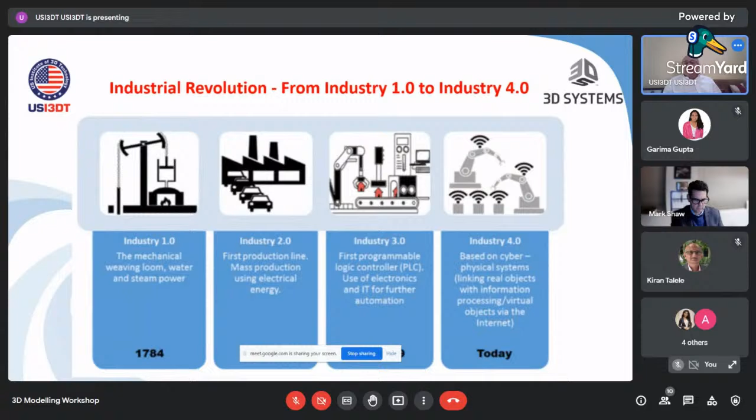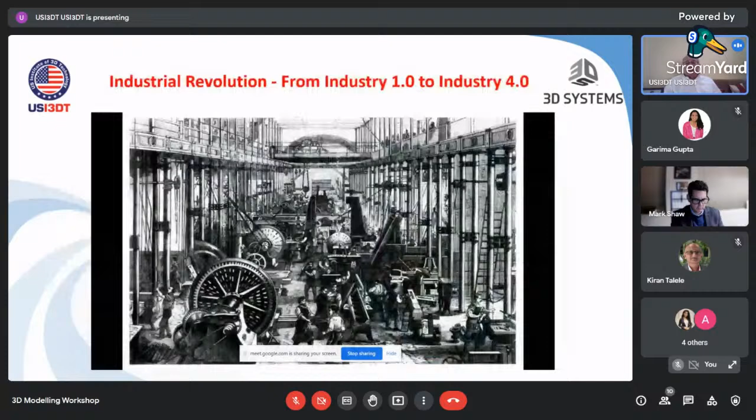Now, as I mentioned, we went through, from the late 1700s till today, different revolutions in different industries, starting with 1.0, then 2.0, 3.0, and now we are in Industrial Revolution 4.0, which includes 3D printing technology and many other technologies like AI, cloud computing, mobile technology, and robotic technology, with 3D printing playing the major role in this 4.0 technology of our century.

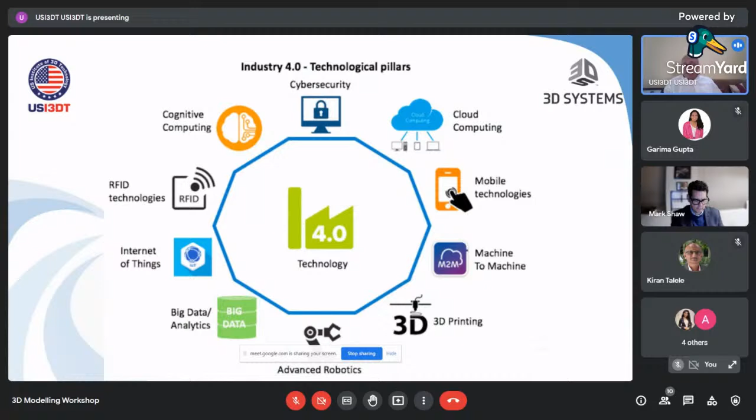I'm sure you know what 3D printing technology is. It's also known as additive manufacturing technology, rapid prototype technology, or layer-by-layer technology. There are many different ways that professionals in many different countries identify 3D printing technology, but bottom line, it's a unique technology.

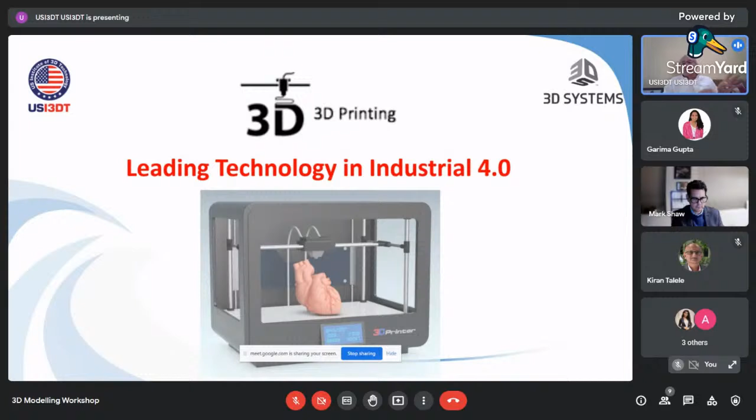Anything you design on your computer screen, you can have that object in your hand. No other conventional technology gives you this opportunity. You can print a house, an organ, furniture, an automobile, a motorbike, so on and so forth. Here you can see layer upon layer creating an object.

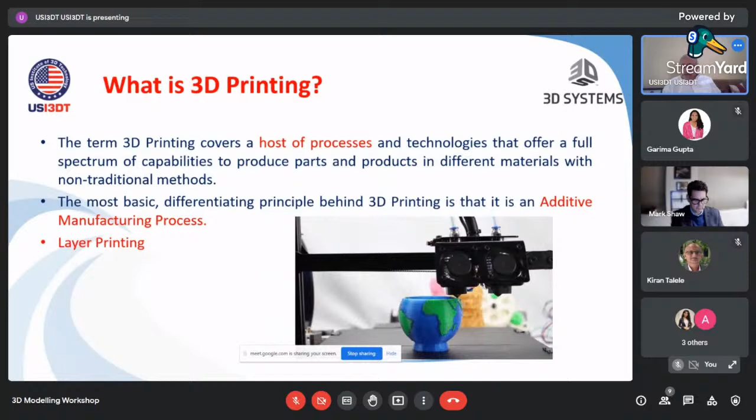If I show you the next slide, a video of how the 3D printer works - as I mentioned, design anything on your computer screen, upload the design, and select the appropriate raw material.

It can be chocolate, glass, metal, nylon, paper, plastic, rubber, biomaterial, or pharmaceutical mixture - whatever you select as the raw material, give a command and it will print. You will have an object in your hand without any other process or removing anything from that object. You will have the final product from the 3D printer, in 3D, right in your hand.

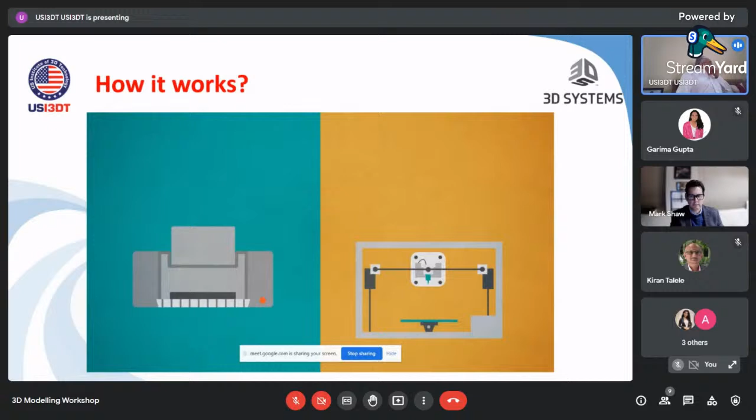Taking over the world. But how does it actually work? You can see in the video. Well, it's quite similar to a normal printer, but a little different. First, you don't put in an ink cartridge, but instead connect a spool of special printing material like plastic, rubber, or even metal.

And you don't print boring text documents, but real-life models of what you've just made on your computer screen. Simply awesome. Right now, you can buy a 3D printer yourself and make complex 3D models with modeling software. But if you're not really a wizard with technical stuff, you can buy personalized 3D models online, like fancy toys, bracelets, or phone cases. Then send it to a 3D print shop nearby, choose a material, and pick up your own unique item.

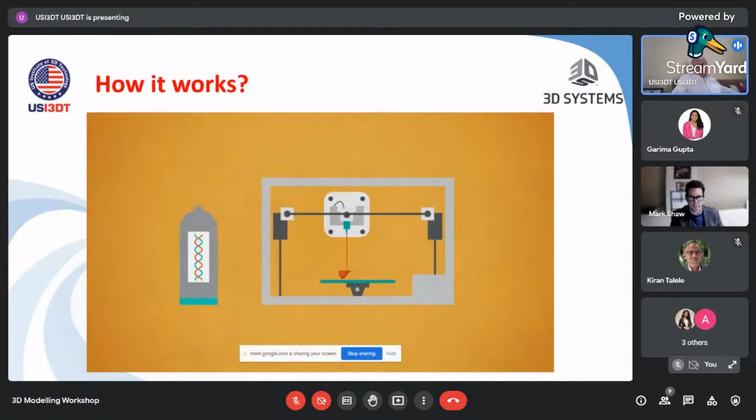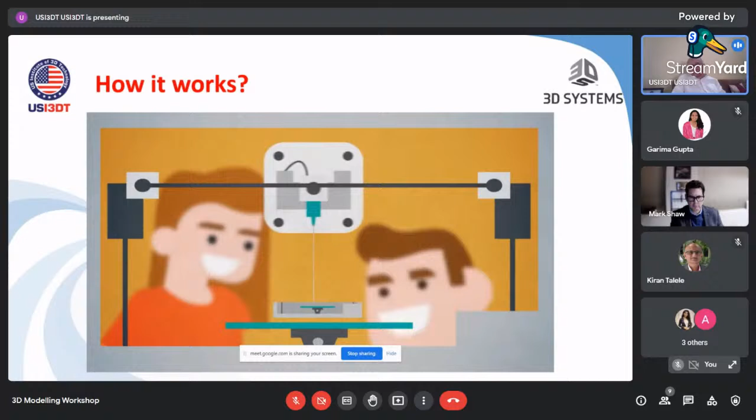And hold on to your seats. They're developing a 3D printer that can print in space and are planning to print a moon base. A moon base! But still, the coolest thing you can print with a 3D printer is another 3D printer. Booyah!

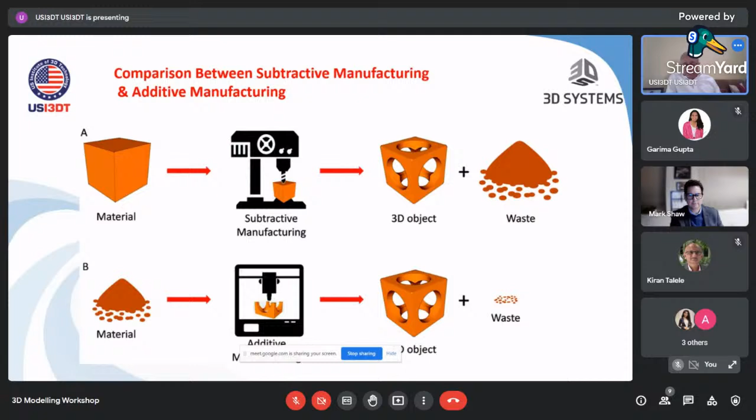Now, as we mentioned, and as Mr. Shaw mentioned, subtractive technology is when you have a big chunk of material and you remove something to give it a shape - that's called subtractive technology. 3D printing technology, on the other hand, is additive manufacturing technology. By doing it this way, it's very environment friendly, saves a lot of raw material, it's cost effective, and allows print on demand, and so on with the help of 3D printing technology.

Raw material - all the raw material available on this planet - you can use to print any object you want: PLA or ABS, carbon fiber, wood, ceramic, precious metal, food stuff, paper, fabric, concrete, or biomaterial. It depends on what you want to print. According to that, you use the raw material and select the technology and equipment, depending on how small or large the object is that you want to print.

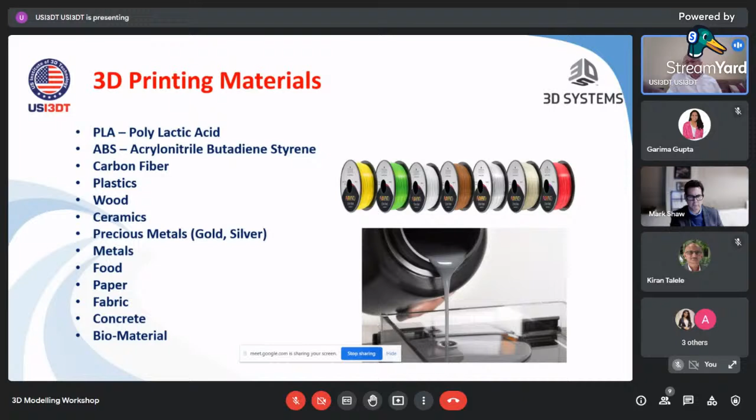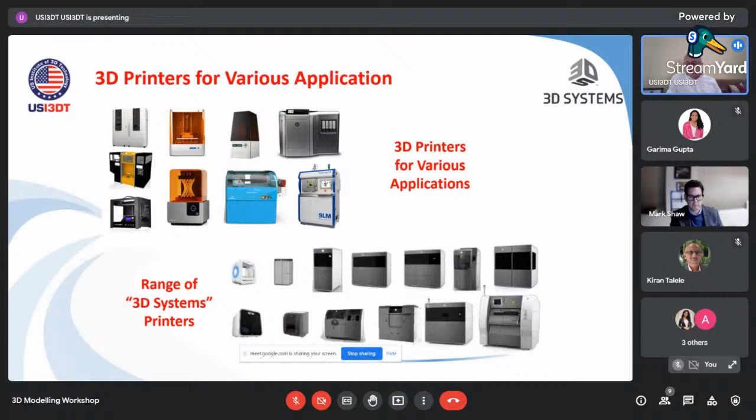There are various kinds of printers with different sizes. It all depends on what you want to print and what raw material you want to use. Here are the commercial grade printers. Industries are using 3D printing technology.

In the next session, we will talk in detail about the industries using 3D printing technology - specifically engineering, prototyping, concept modeling, plastic goods manufacturing, automobile industries, aerospace and defense including NASA, Boeing, Airbus, and so on, civil, architecture and interior design, medical and healthcare, jewelry, shoes, food, culinary, hobby, art, education, and so on. In the next session, we will focus on each industry and how they are using 3D printing technology.

But today we are giving you just basic information on 3D printing technology and where it is used.

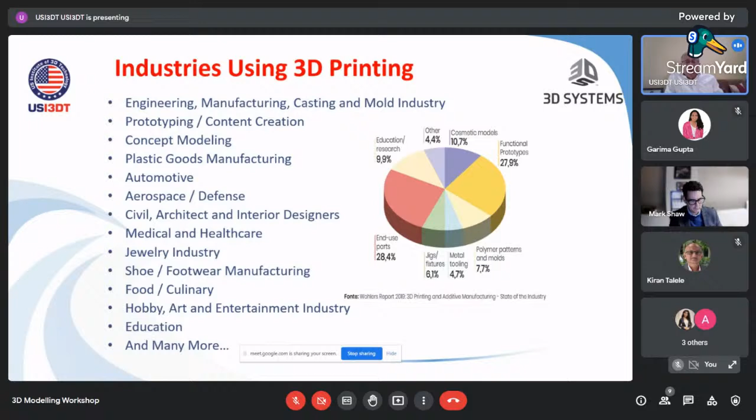After completion of the certification course of 3D Systems Corporation - which has clients in more than 85 countries, 25 offices worldwide, and has sold tens of thousands of printers, with clients ranging from the Fortune 500 to the Fortune 10,000 in various fields like aerospace, defense, automobile industry, consumer electronics, pharmaceutical industries, and consumer products manufacturing - we will also talk about all these corporations and what kind of printers they use and how they use 3D Systems equipment for their manufacturing units.

We will also talk in the next session about where, after completion of the course, you can potentially get opportunities to work. At the same time, since you are bright kids of India and the startup concept is very popular in India today, if you have an idea to start or develop your own business and need funding or help, the US Institute of 3D Technology and its contacts can help you in India as well as in Silicon Valley to make your dream come true.

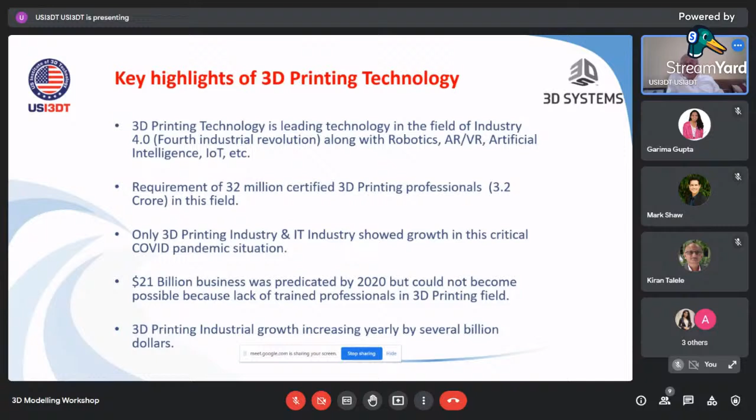The growth of conventional manufacturing facilities is around 1 to 2%. CNC growth is around 2 to 4%, where the 3D printing technology growth is unlimited - it runs in the trillions of dollars. Companies like Reliance, Wipro, Hero, every automobile industry, are using 3D printing technology.

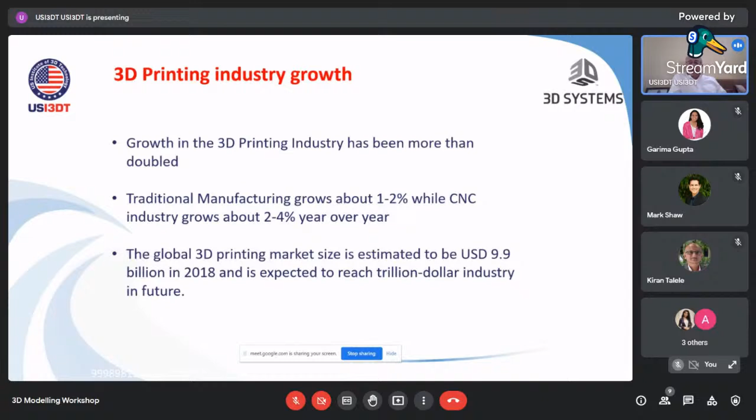In December 2020, the Government of India published a government policy on additive manufacturing technology for the next 5 years, where the U.S. Institute of 3D Technology played a big role in putting this policy together and educating appropriate government officials on the potential of 3D printing technology. We are also listed on page number 29, if you want to refer to this Government of India policy. Growth of 3D printing technology runs in billions and trillions of dollars versus any other conventional manufacturing technology.

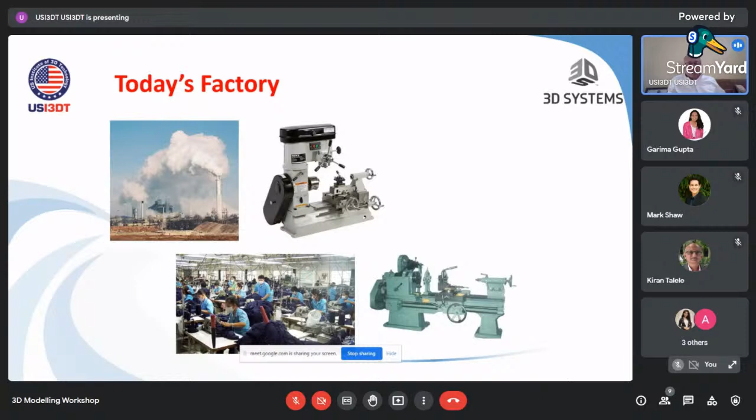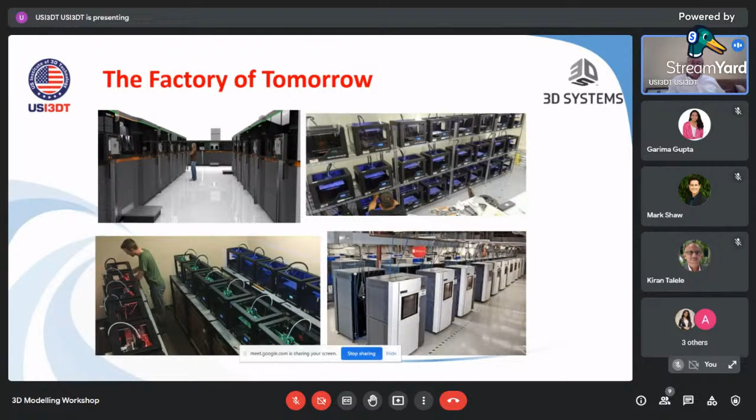This is today's factory in India or anywhere in the world. This is the factory of tomorrow - a real factory slide of a factory in Los Angeles, California, that is using hundreds of 3D printers with different technologies for mass production of their product.

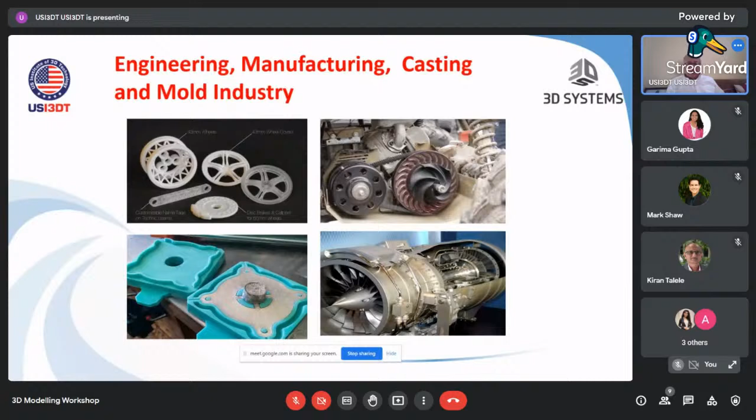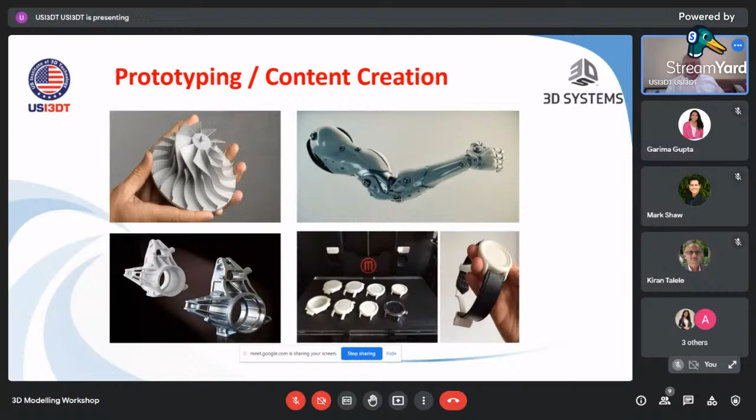As I mentioned, every industry is using this - examples include casting and molding industry, pattern and casting process, injection molding industry, content creation or concept modeling industry, plastic goods manufacturing, and automobile industries.

If you have a 1918 Model T or a 1930 Chevy and you don't have parts, what do you do? You scan the parts and print it, put it in your collector's car, fix it, and you are done. So this is the automobile industry - most automobile industries coming out with a new model don't have to make any mold or die before they make a prototype. They can use 3D printing technology.

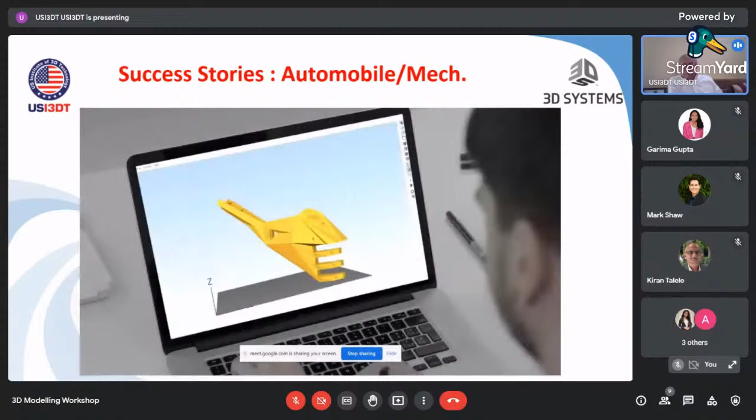Here is a real electric motorbike. It's in the market in Europe, and will also be available in India very soon. Forget the old ways of production, forget the long assembly lines and complex logistics. What if you could go from light bulb moment to final production in just 12 weeks?

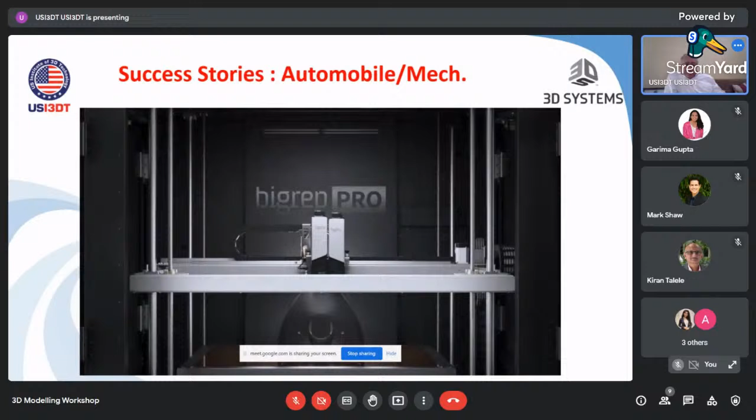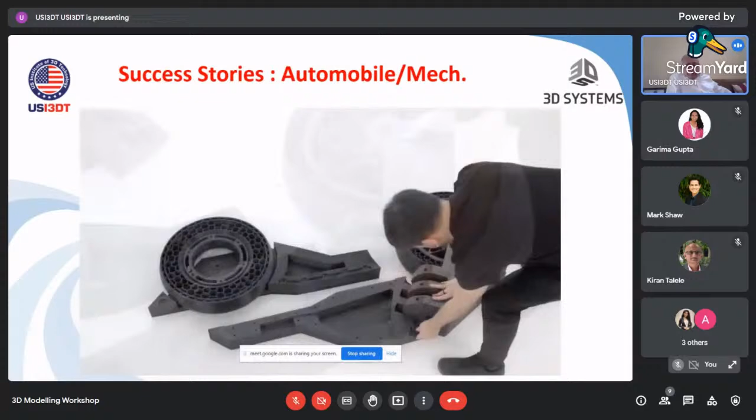Fully 3D printed, only 15 parts - an e-motorcycle that drives you to the future of production. NERA is a full-scale 3D printed functional prototype, fully equipped with a clamped fork for strength and precision, structurally optimized rhomboid wheel rims, airless tires with customized tread. A flexible parametric bumper replaces suspension. All parts are printed with BigRep technology using BigRep materials. Envisioned by NowLab. Printed with BigRep. Cut costs, save time, print on demand. Welcome to the new era of manufacturing.

Now, this motorbike will be available in India also very soon - I hope within the next 2 years. So you don't need any factory, you don't need to transport from factory to the dealership. Go to the dealer, they have a printer there, they have raw materials there. You select your choice of color, and in the next day or two, it will be printed for you, and you just walk away. You don't have to worry about a flat tire ever, because the tires are also airless and printed. So how convenient it is.

Now, in aerospace industries, you must have heard about 300 people who are going to go to Mars to live forever.

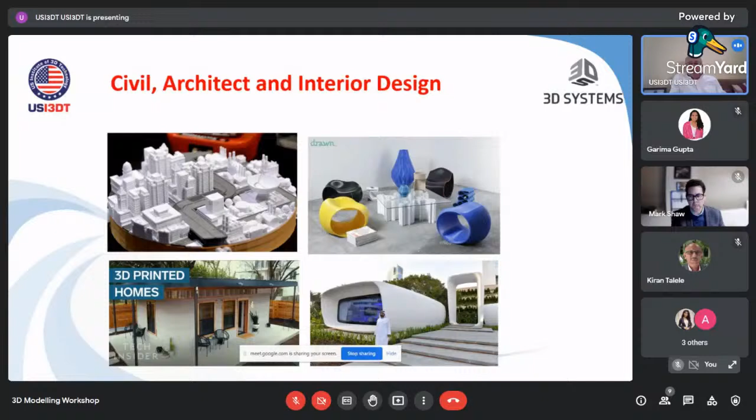Again, we will talk in detail in our next session about how, if you are a civil engineer, you can use this technology for your own benefit as well as the benefit of society. Now you will see that this house is 1,500 square feet and cost under $10,200.

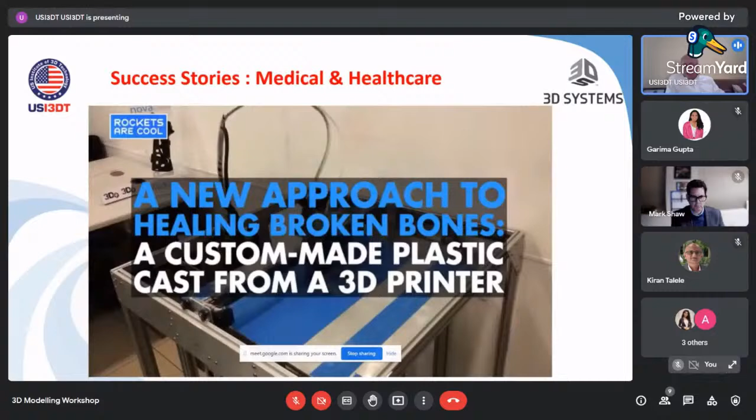Orthopedic surgeons and cardiac surgeons are using 3D printing technology, and you can see in this video how it is helpful to a patient without hurting them, compared to the conventional way of using a plaster or something like that.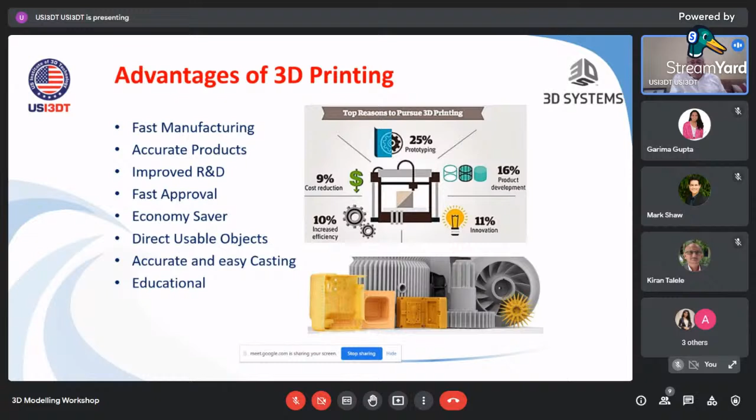Advantages of 3D printing technology include fast manufacturing, accurate products, improved R&D, fast approval, and economic savings, among others. We'll talk more in detail in our upcoming session, where you'll learn everything from reverse engineering to designing to printing, usage of raw materials, and how you can use different technologies for different products with different raw materials. So you'll have a complete learning opportunity. After the certification course, you'll have an opportunity to do a paid internship up to 60,000 rupees a month, as well as overseas placement opportunities up to $160,000 a year.

This certification course opportunity exists almost everywhere in the globe, but mainly at this time in Europe, Northern America, Japan, Southeast Asia, and Far East Asia, like Taiwan, Korea, or China, which use 3D printing technology more widely than a country like India. India is also using 3D printing technology, more and more than before.

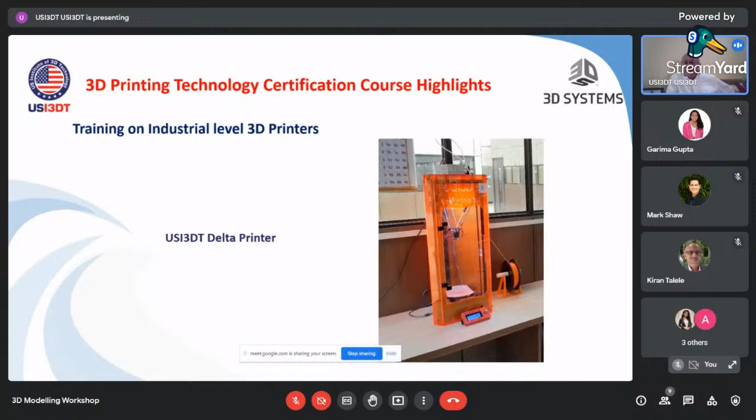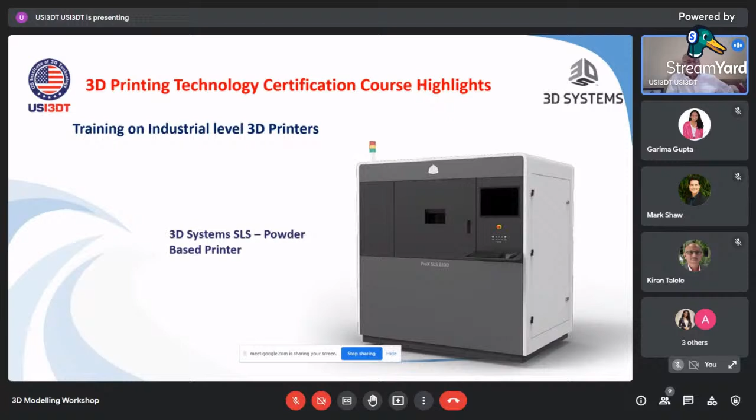In other words, you will have hands-on experience with unlimited usage of raw material in your practical sessions. Once you've completed the course, you'll be a perfect master in the domain of 3D printing technology.

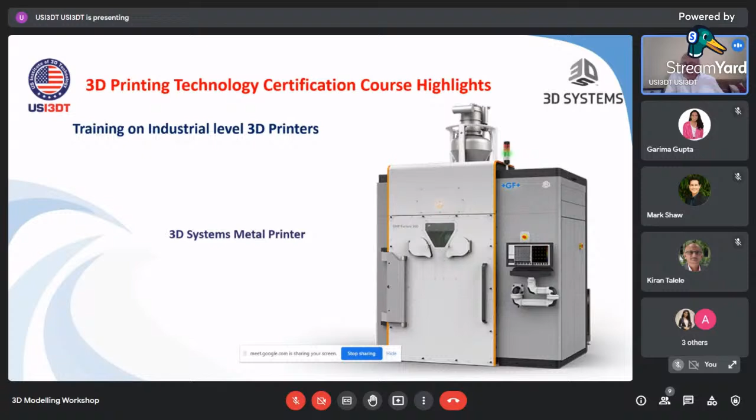Why US Institute of 3D Technology? We are the only one at this time with qualified educators representing 3D Systems Corporation for the certification course. We are the only one with an arrangement with the Government of India and some state governments, as well as prominent institutes like Bhavans and many others. We are the only one who provides, with the help of 3D Systems Corporation, paid internships as well as domestic and overseas placement where 3D printing technology is used. We are the only one at this time helping entrepreneurs in this domain develop their concepts.

We have a unique arrangement for training with Europe and the United States. In other words, if you want to go to the United States or Europe to learn 3D printing technology after completing the course, and do an internship there, we facilitate that training program for you in Europe, the United States, or North America.